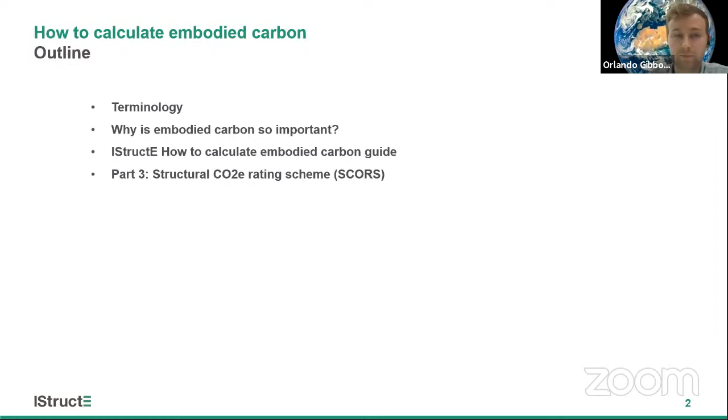So terminology: what is embodied carbon? Basically, when we have a building, we produce products, transport those products to the site, and construct the building or infrastructure asset on site. During its lifetime there will be some maintenance and repair works, and when that building or asset comes to the end of its life, there'll be processing of those materials to either recycle, reuse, or dispose of them. At each of these stages, various amounts of material, resources, and energy get input into the system, and out the other end comes a load of waste and pollution, and also greenhouse gas emissions. It's those greenhouse gas emissions that we call embodied carbon, related to the use of material resources and everything around it.

Another term good to be aware of is whole life carbon. Whole life carbon is embodied carbon, which I just briefly explained, plus operational carbon. Operational carbon is the emissions released during the operation of your buildings - that's heating, electricity, or in the UAE a lot of cooling, and water usage as well. So whole life carbon is those two things added together.

This is how we normally visualize whole life carbon, embodied carbon, and operational carbon. We use these life cycle stages and modules, split into four different stages: A, B, C, and D. A is all about producing the product, transporting that product to site, and then constructing it on site - that's A1 to A5. Then the in-use stage, B1 to B5 in the pink, and B6 and B7 in the yellow - that's stage B, about the use of the building.

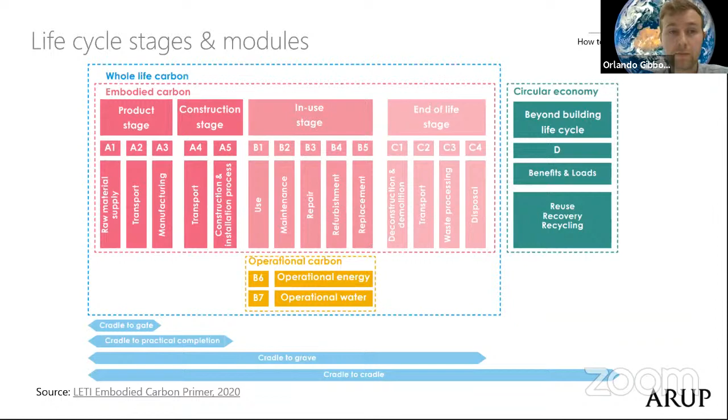And then lastly, you might have heard of the term net zero carbon, and there's lots of confusion about this. This term is still being properly defined in the industry, even in a part of the world where embodied carbon is a relatively mature subject to talk about.

It's still in its infancy compared to lots of other places in the world. Net zero carbon is basically where the emissions associated with some activity...

plus any offsets. Offsets means anything that's either taking greenhouse gases back out of the atmosphere, reducing the amount of greenhouse gases either by sequestration and storage, or by replacing a business-as-usual method with a much lower carbon method. There are a few different types of offsets - to be honest, offsets isn't my specialty, so apologies if that's wrong, but it's when those two things balance and equal zero. So basically you can think of offsets as negative emissions, and emissions is obviously any emissions getting released into the atmosphere.

With that, when we consider net zero there's a tendency to think, okay, I don't need to worry about emissions so much, I can just have loads of offsets and that's a good job done. But really we need to make sure that emissions are minimized as much as possible, because that's the most important thing. Offsets won't always be available to us as we hopefully use less and less energy, so offsets should really be a last resort.

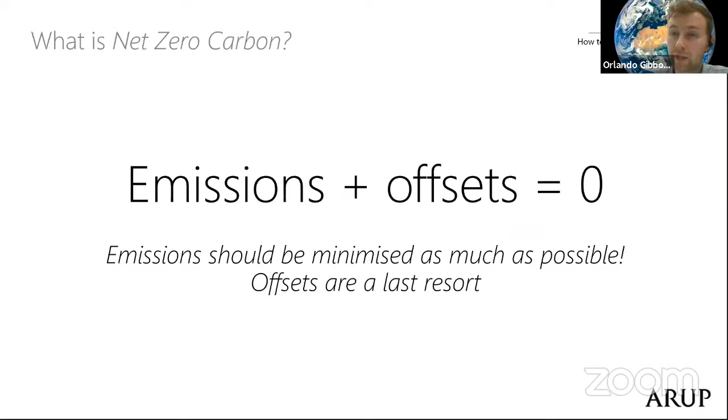And lastly, carbon is sometimes used as a common term for carbon emissions equivalent, which is basically any greenhouse gases such as carbon dioxide, methane, and water vapor and others normalized to the same global warming potential as carbon dioxide. So global warming potential is basically the ability of that gas to trap heat within the Earth's atmosphere.

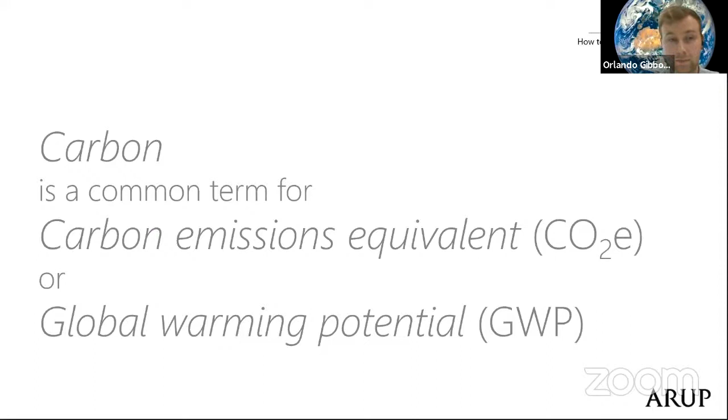So why is embodied carbon so important? As we've all heard, I hope, global temperatures are increasing. This is a sketched version of a graph from the IPCC, the Intergovernmental Panel on Climate Change, and it shows temperatures across the globe steadily increasing.

You might have heard 1.5 degrees C - we're trying to keep below that, but at this stage, where we are now in 2021, it's looking pretty inevitable that we'll get there. But we really need to make sure we don't go past 2 degrees C, because that does a huge amount of damage through changing the way our climate works.

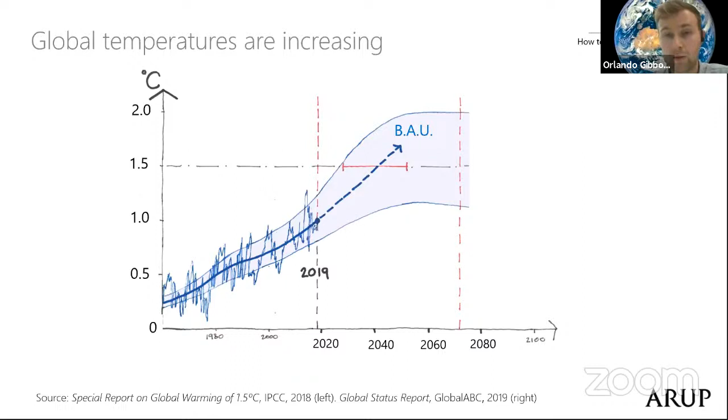In terms of the impact that getting to 1.5 and 2 degrees C have on the planet, you can see here: when we get to 1.5 degrees C, sea levels will rise by 0.85 meters, corn and wheat yields will reduce by 10%, and there'll be a lot more heavy rainfall over land. When we get to 2 degrees, considered the safe limit for ecosystems and civilization as we know it, there's still a huge sea level rise across the planet of 1 meter. Some cities will start to drown, such as low-lying cities like Amsterdam, and corn and wheat yields will be even worse - you get the idea.

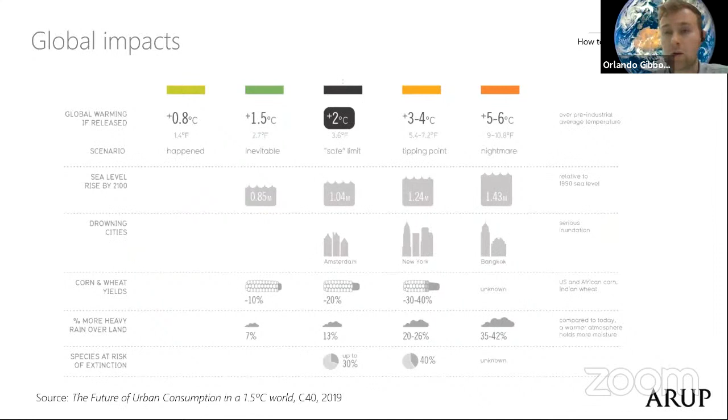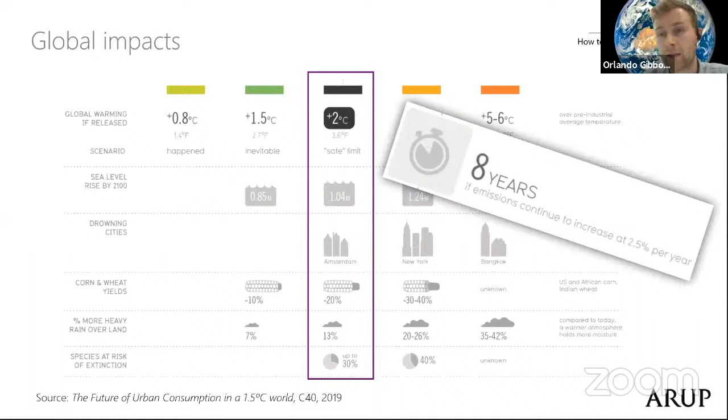So the further we go beyond these points, the more drastic the impacts on our lives as we know it will be, and also on ecosystems and biodiversity around the planet. Based on the carbon budget at the moment, when we're thinking about how much carbon we need to release to get to this 2 degrees C warming, at the current rate of emissions that is only 8 years away. So that gives a real sense that we need to do so much more than we currently are to change this around, to make sure we're not impacting everyone on our planet and future generations.

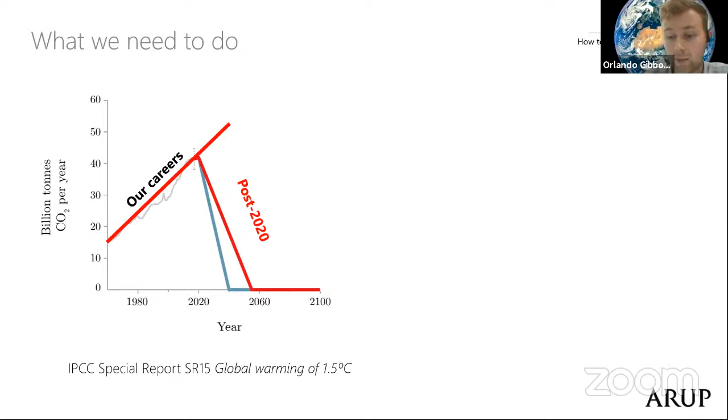So what do we need to do? As our careers have been going along, emissions have increased, as I've already talked about. Post-2020, we need an extremely sharp decline in the emissions we're releasing. This graph is from the IPCC, and that's without carbon capture and storage. So to do this, we need rapid, far-reaching and unprecedented change.

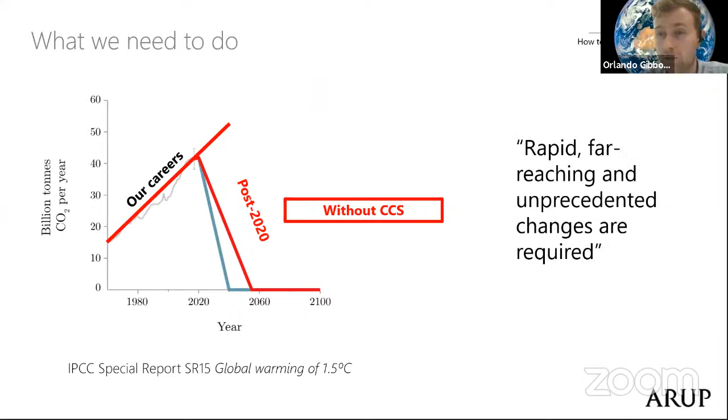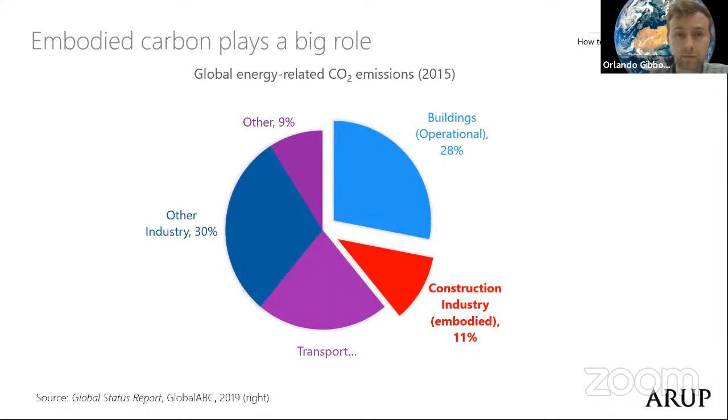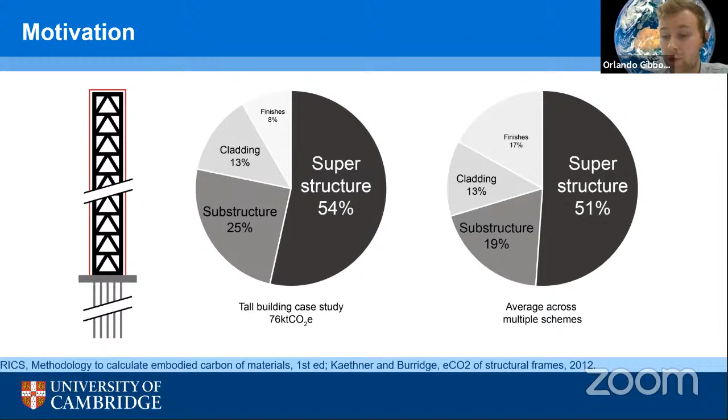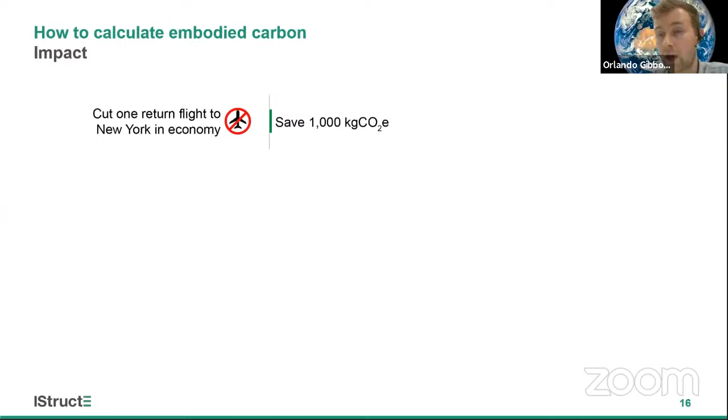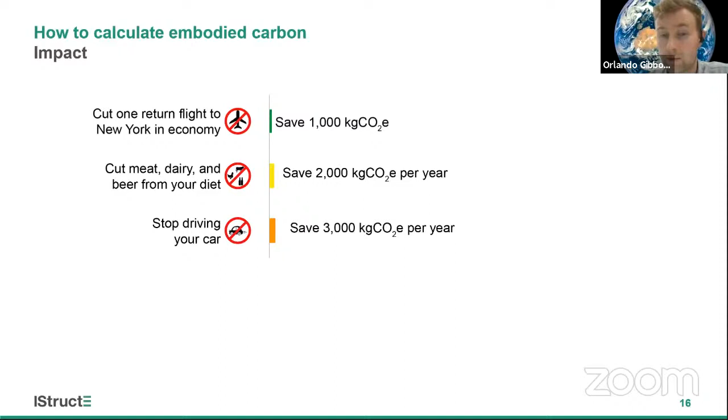If we compare this to our own personal impacts, here are some figures. One return flight from London to New York in economy: if I don't do that, I might save 1,000 kilograms of CO2. If I cut meat, dairy and beer from my diet, I might save 2 tons of CO2 every year. If I stop driving my car around 10,000 miles, I'll save 3,000 kilograms of CO2 per year. But if I make sure that on every project I work on, I reduce the structural embodied carbon by 20%, that would equate to a saving of roughly 200,000 kilograms of CO2 per year. That shows the scale of impact we can have as structural engineers on reducing emissions.

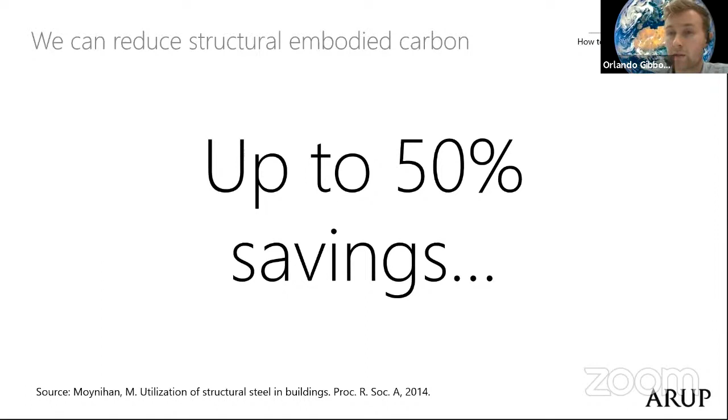So basically, as simple as this, we need to do everything we can to minimize embodied carbon of all of our projects everywhere in the world, and we need to do it now. And we can do it. Studies have shown that we can achieve up to 50% savings if we rethink the way we design in some cases and put more thought into it.

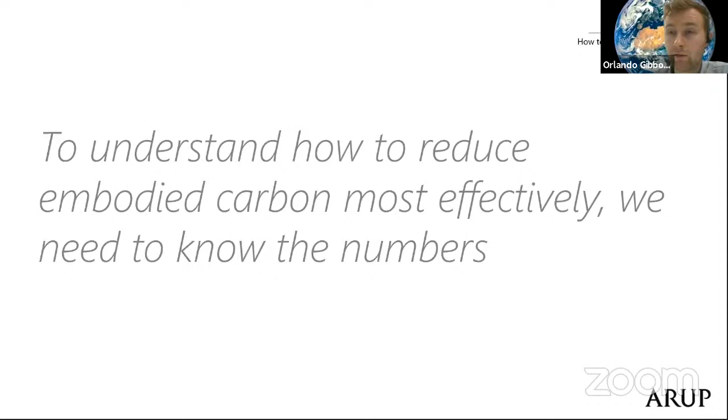Really, to understand how to reduce embodied carbon most effectively, we need to know the numbers. We need to understand what the embodied carbon is in our projects and where it lies in our structures. This really led to producing the guide on how to calculate embodied carbon, which is freely accessible on the IStructE website for anyone. I'm going to talk about it more now.

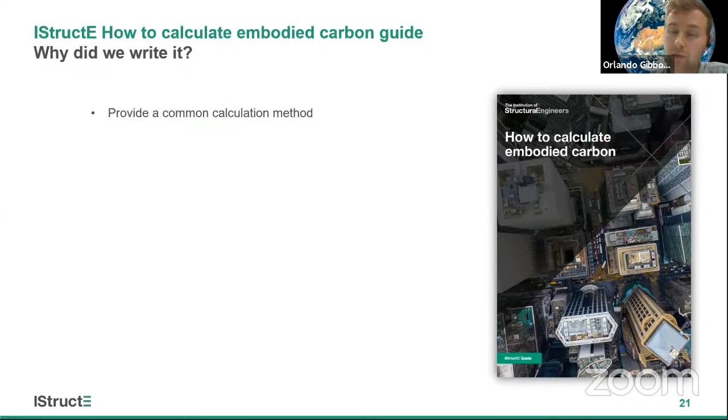So why did we write it? Well, to provide a common calculation method, because in places where embodied carbon is calculated, it can be done in slightly different ways, and there is some ambiguity about what should be done. So this was to provide some consistency. By making sure everyone's calculating it consistently, we can actually start to compare designs against each other, because comparing two different things that are done differently just doesn't make sense.

We calculate embodied carbon to improve our understanding of it. We understand where it typically lies in our structures and how we can reduce it, support material demand reduction, and help us find new ways to reach net zero, which is one of those terms I mentioned earlier.

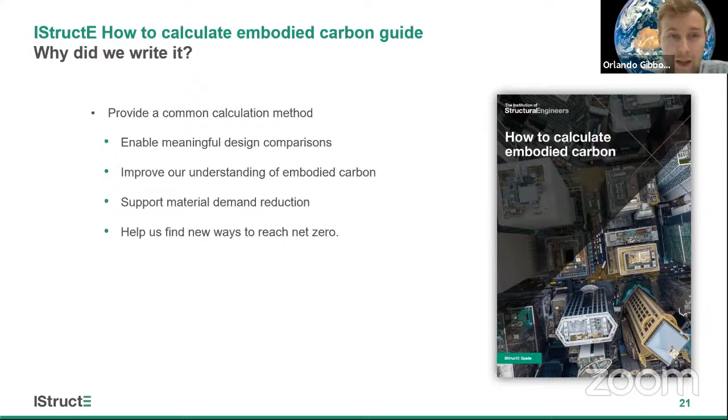I wrote this guide in collaboration with Dr. John Orr from the University of Cambridge, and we had the help of many people who provided fantastic comments and input. Thank you to all of those people—it wouldn't have been possible without them.

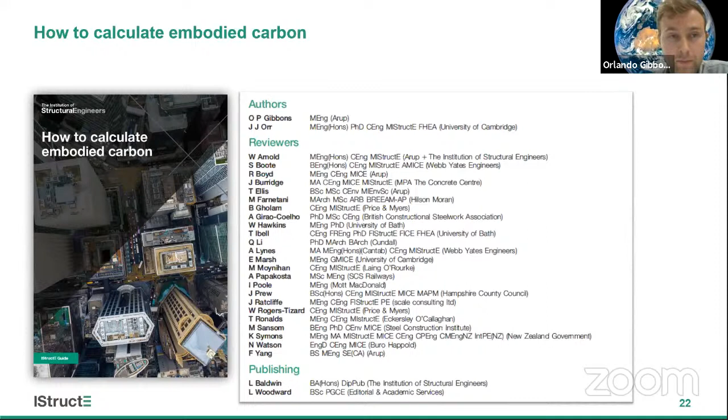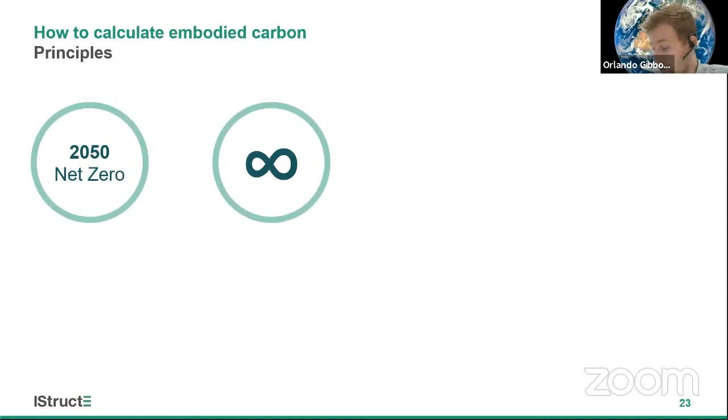We need to evaluate design decisions against their carbon impact, considering how much emissions each design decision has associated with it. We need to communicate this to the design team so we can work together with other disciplines to reduce carbon emissions. And then, of course, we need to reduce carbon emissions, as I just said. Lastly, we need to report these findings from our projects—we need to share this data so everyone as an industry can learn more and push carbon reductions further.

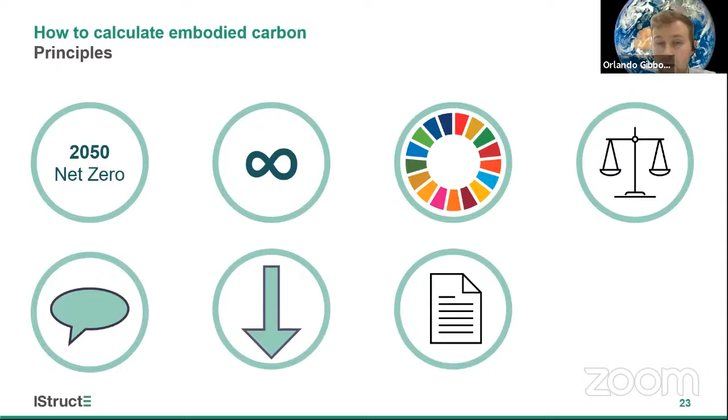And then this is something that we've done in the guide. I'm sure you can go on the IStructE website and type in how to calculate embodied carbon and come up with the guide. And within the guide, there are some things we've done to try and make bits of information clearer to the reader.

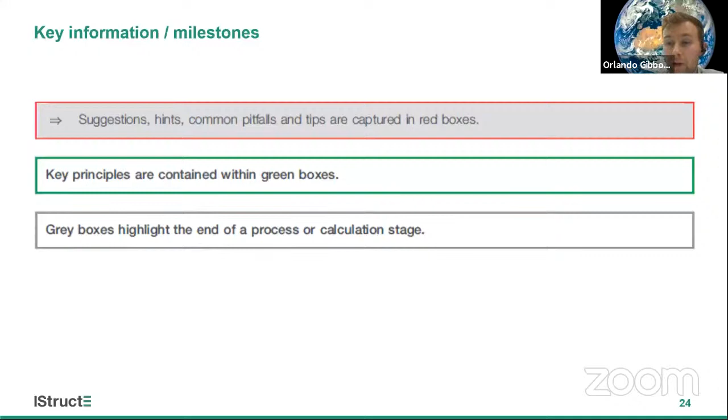We've made some suggestions, hints, common pitfalls and tips. In the red box, and in the green box we have key principles, and in the grey boxes it highlights what you have at the end of a part of the process. So the structure of the guide is: inputs to the calculation, the process, and the output. It's structured around that very simple idea.

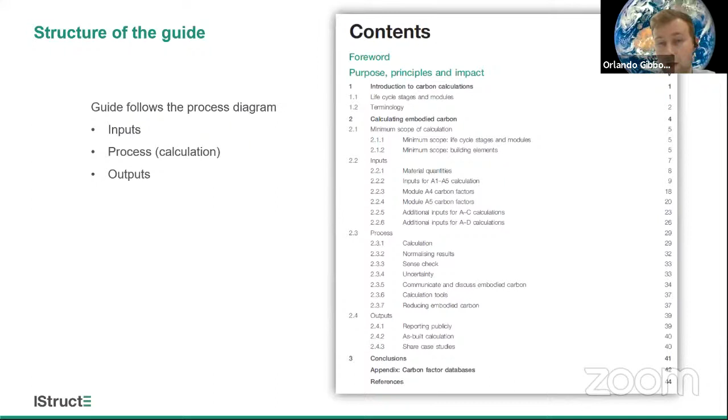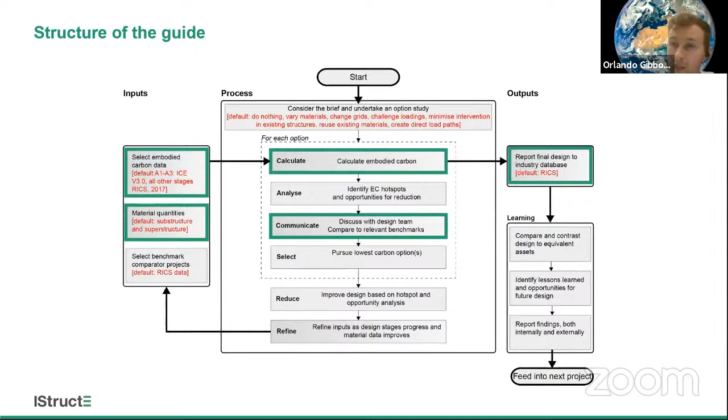This is the flow diagram we use to describe the different parts of the process. Inputs on the left, process in the middle, outputs on the right. With inputs and process, any good consideration of embodied carbon should iterate between these two, because the data and inputs you have will develop in accuracy as your project goes into more detailed design stages. You'll want to update those inputs to refine your carbon calculation.

Something definitely worth mentioning, and I encourage you all to search this on your internet browser: in March, the structural carbon tool was released. This is a project between the IStructE and a design consultancy in London called Elliott Wood. It's a fantastic tool, Excel based, very easy to use, accessible from the website, and there are video tutorials on how to use it.

It currently contains mostly UK relevant data, but you can add any data you want to it, so anything more relevant to the UAE. It's basically the How to Calculate Embodied Carbon guide in Excel version. It distills the guide, brings it into Excel, and allows you to get on with it much quicker, which is brilliant.

So, how to calculate embodied carbon. Throughout this I've got a worked example that I'm going to go through. I might go through it relatively quickly because I want to leave time at the end for questions. This imaginary project is in London, a commercial building, 56,000 square meters, construction cost of £120 million.

The roof extension had CLT, which is cross-laminated timber, on a steel frame, a side extension of some concrete with new foundations, and also a refurbishment of an existing building.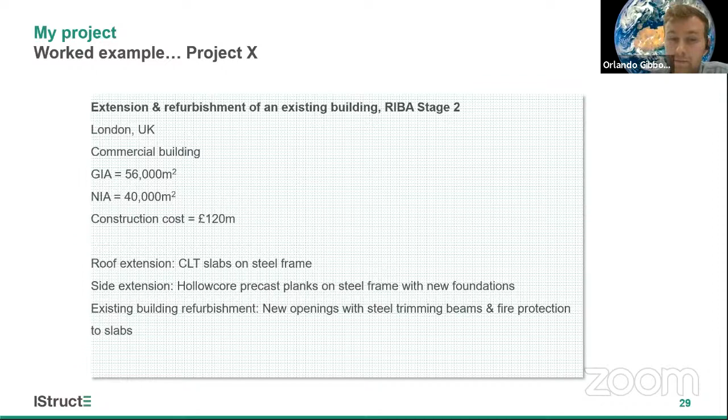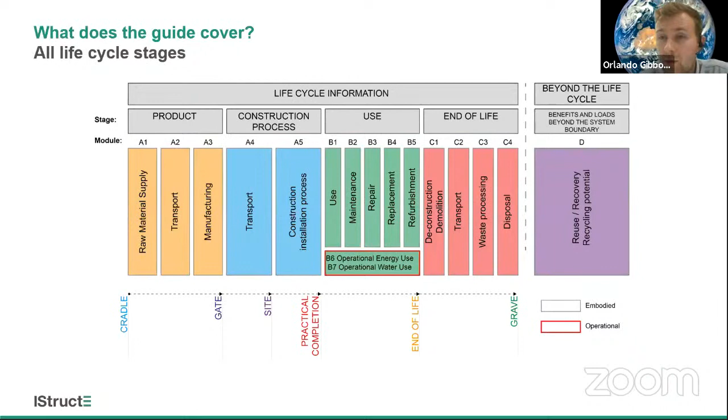So the first thing we need to think about is the scope of our calculation. These are the life cycle stages discussed at the start. This is the first thing you need to consider: what is the scope in terms of life cycle stages. The minimum scope we say in the guide that you should consider is A1 to A5. This is the minimum - you shouldn't consider less, but considering more is better.

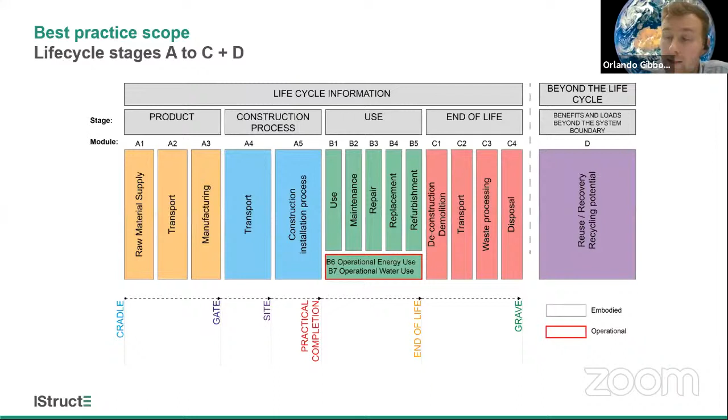If you were to consider all of the life cycle stages, from A to C including module D, that is the ideal scenario. But appreciate that a lot of people new to this topic - actually focusing on A1 to A5 is best. It's where we have our highest impact, and it also simplifies the calculation a bit.

So why do we use A1 to A5 as a minimum? A1 to A5 is basically material extraction all the way to practical completion on site - when the building's finished and just before people are about to move in and start using it.

A1 to A5 emissions are all released by the time the building is being used, so they will be released before 2050, which is our deadline for getting to net zero. We have most certainty over A1 to A5 emissions data because it's happening closer to the time we're actually in right now, and the majority of structural embodied carbon is in modules A1 to A5.

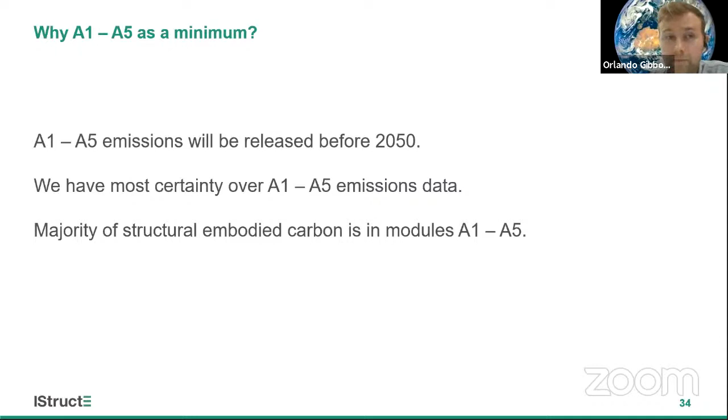In terms of minimum scope regarding building elements - so there's the life cycle stages we consider, but also which parts of the building we're thinking about. This table here is from a Royal Institution of Chartered Surveyors guide. If you pay attention to the right-hand column, this gives you a list of the things you should be including in your embodied carbon assessment.

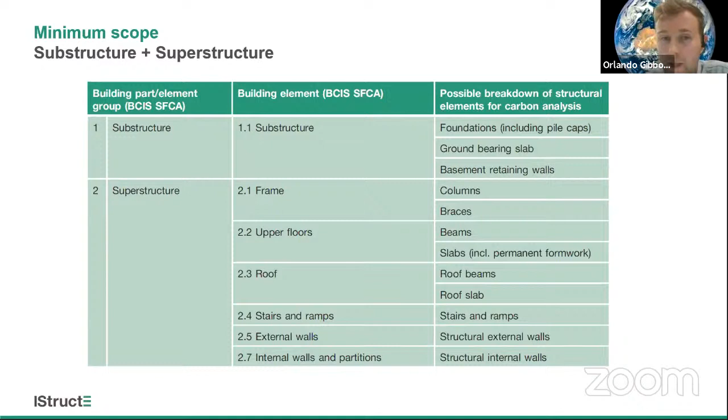For example, you should consider fire protection because fire protection is something that provides a structural function. It makes sure that the structure retains its structural integrity through different scenarios.

You should coordinate the scope with the rest of the design team. So if the architect's also looking at embodied carbon, make sure that you coordinate with them so that you're not both duplicating work, but also doing it all consistently.

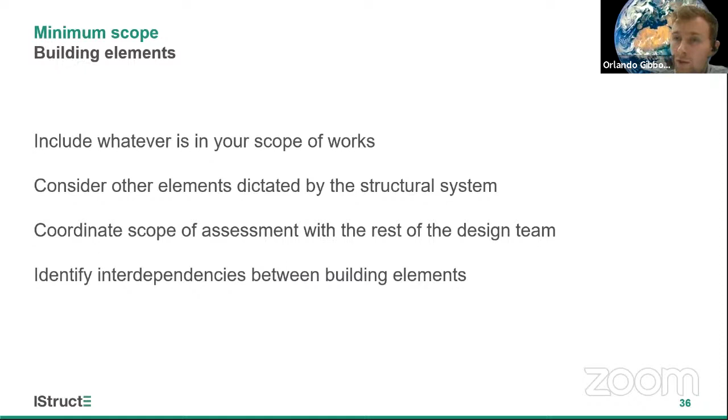And then identify interdependencies of building elements. So think if you are increasing the depth of your floors, what effects that might have on the facades, or if you're using exposed concrete rather than steel that's protected with fireboard, think about what that might do to the ability for the building to store thermal mass and reduce operational emissions. So those are other things to consider alongside embodied carbon.

So the fundamental principle is probably the simplest calculation you're going to do on your project. You calculate your quantity of material, which we do in design anyway, and you multiply it by a carbon factor. You basically do that for all products used at each stage of the life cycle.

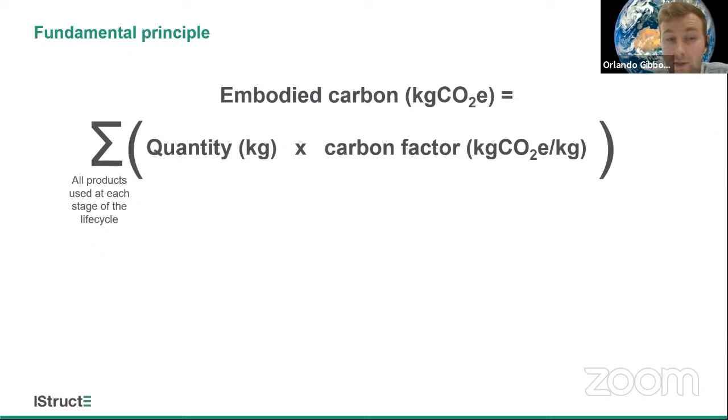So obviously, for quantities, there are numerous ways to do this, and it depends on design stage. You'll have your own way of doing it. Maybe we'll come on to that in a second, actually.

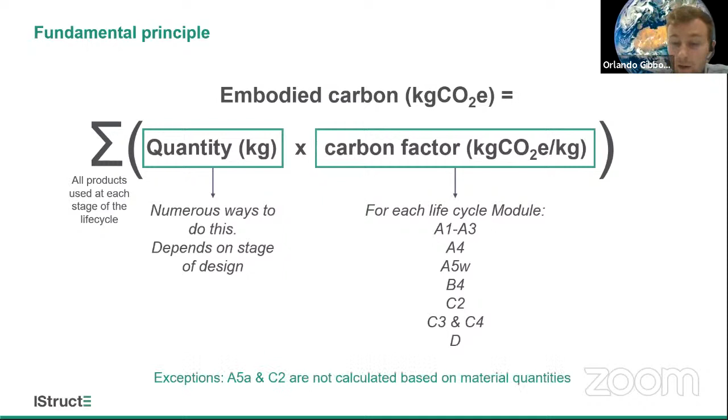And for carbon factor, there's a different carbon factor for each life cycle module, A1 to A3, A4, A5W. Those are the ones that we're going to be looking at. So for our make-believe project, we'll be looking at A1 to A5, which I mentioned earlier.

So think about the inputs now, which are material quantities and embodied carbon factors. So the inputs to this calculation. And on the process diagram, this is where it sits.

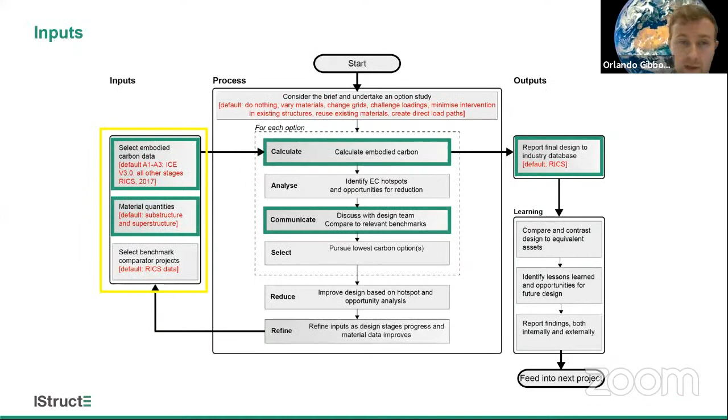First of all, material quantities, you can get these from a number of places. Just make sure it's appropriate to your stage of design. So it can be from scheming manuals, so sort of rules of thumb. It can be from your previous project experience. You might have worked on a similar project and you know the kilogram per meter squared of steel that was used, or the reinforcement rate.

You can obviously do your own manual calculations. You can use a quantity surveyor's cost plan, or a cost consultant, as it might be referred to over there. Use your structural analysis models to generate the quantities, or use your building information models to generate the quantities.

But make sure that if you are using some sort of modeling software to get quantities, that you also include partially modeled or unmodeled elements. For example, something that's normally not modeled in building information models is reinforcement within concrete, or the fire protection, or the damping, the screed, that's helping to damp the vibrations of your floor system.

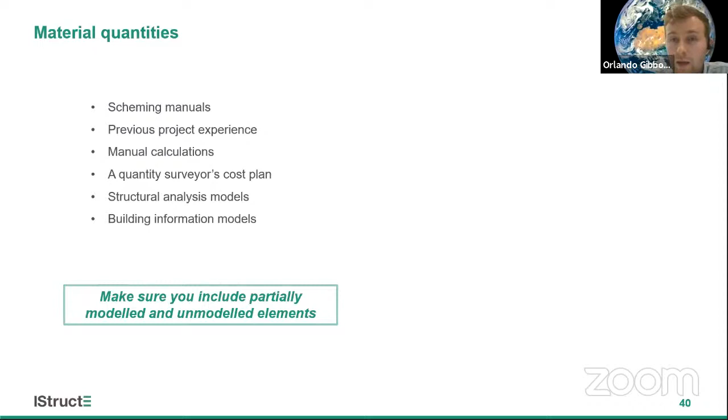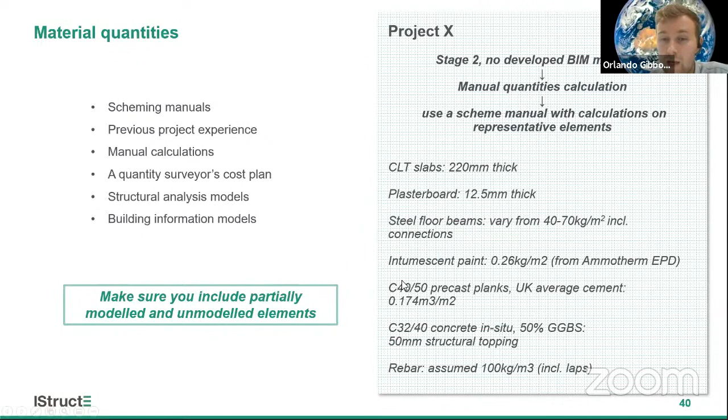So in this example, let's say we're at stage 2, so we have no developed BIM model. I did a manual quantities calculation, and I used a scheme design manual to get quantities for representative elements. These are the quantities of my different materials and any assumptions that I've made.

One of the things you really need to bear in mind is that in the early design stages, we don't have perfect information. We don't know exactly what's going to happen at the end of the project when it's actually built. But do not let this deter you from calculating embodied carbon. The uncertainty in quantities will decrease over the course of the project, and you can update your calculations to reflect this. But if you miss the opportunity to calculate embodied carbon and see how you can reduce it in the early design stages, you lose a huge amount of the potential to reduce carbon.

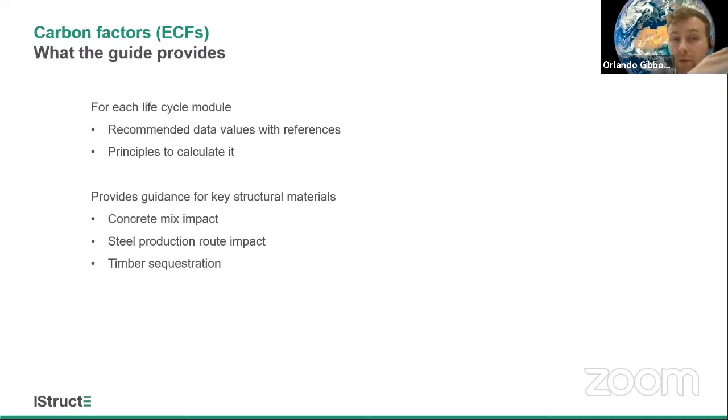So the guide provides this information. It has recommended values for each lifecycle module. It provides guidance for key structural materials, and it references the RICS guide, which is the UK best practice standard for calculating embodied carbon. It is UK focused, but we do reference data from elsewhere in the world where it is available. I think Julia is going to help us out with that later on.

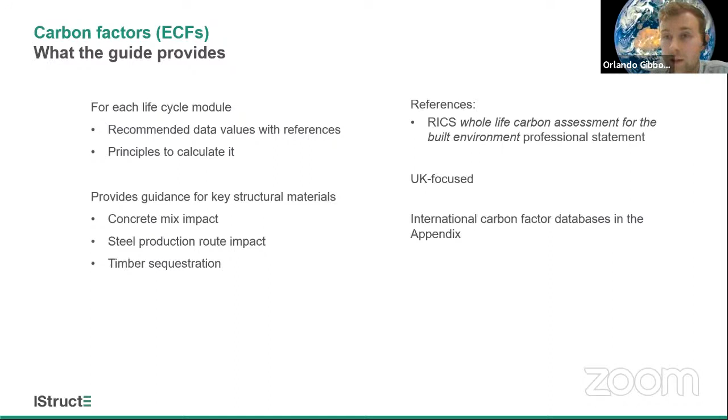So carbon factors for modules A1 to A3.

They're very dependent on production method and location, so take that into consideration when choosing which ones. Don't be deterred from calculating embodied carbon due to uncertainty in these factors. Supply chains are complex things, and it will be difficult to have precise information on the emissions of your materials. But you need to think logically about your best guess, and proceed on that basis.

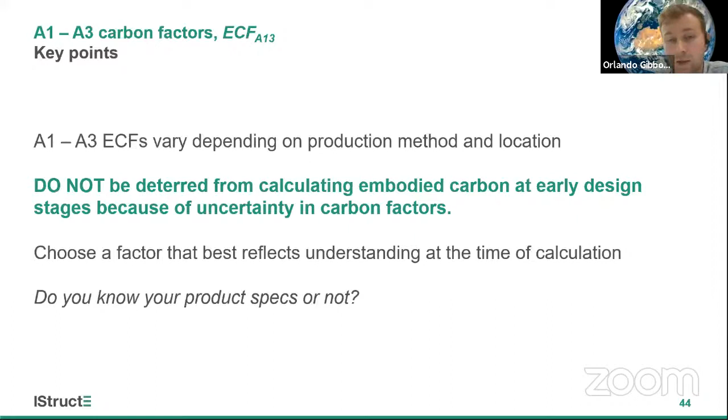The way we split this up in the guide is we first consider whether you know the specification of your material or product. If you don't know that, which is normally at the early design stages, we've included a table in the guide that recommends typical values to use as a starting point.

So Julia, can I invite you to jump in here? Yes.

So we just talked about EPDs. We must say that for UAE, we do not have a comprehensive carbon factors library, nor for any countries in the Middle East that we are aware of in our IStructE regional group. But there are EPDs available for lots of materials like steel, rebars, concrete, and precast, and they are region-based.

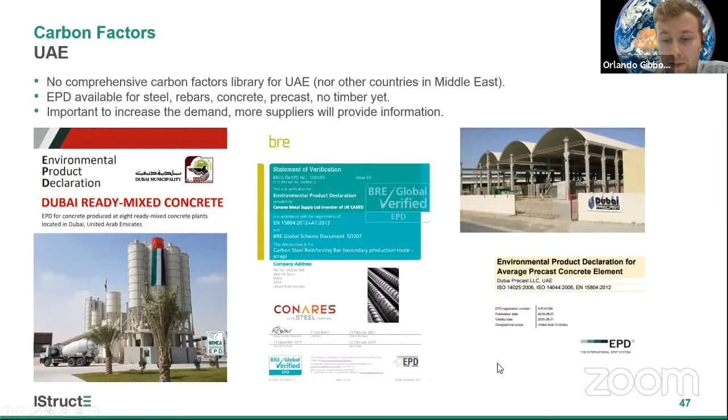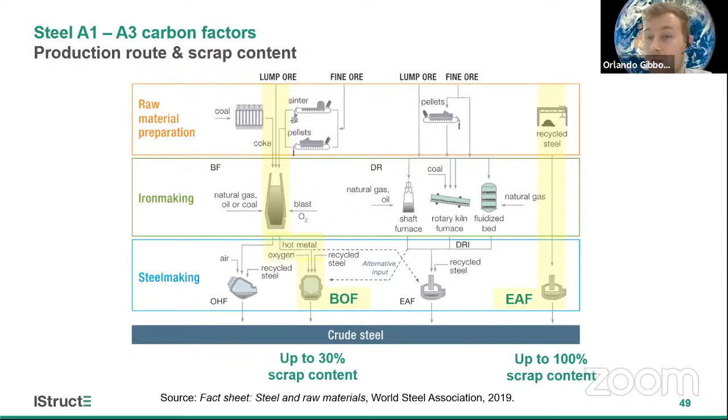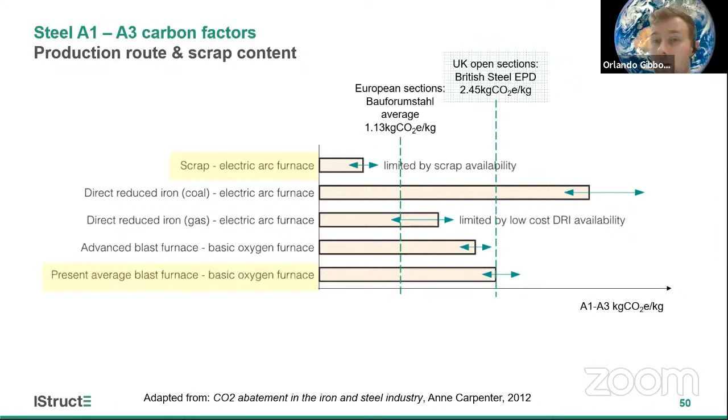I've marked on this graph a couple of EPDs that we use in the UK and in Europe to work out the embodied carbon of steel.

When the tree is cut down, typically only 50% of the stem is used for construction, and the other material in the crown and other parts of the stem are used in other industries. Then at the end of the life cycle of that piece of timber, that carbon will be released back into the atmosphere in one way or another.

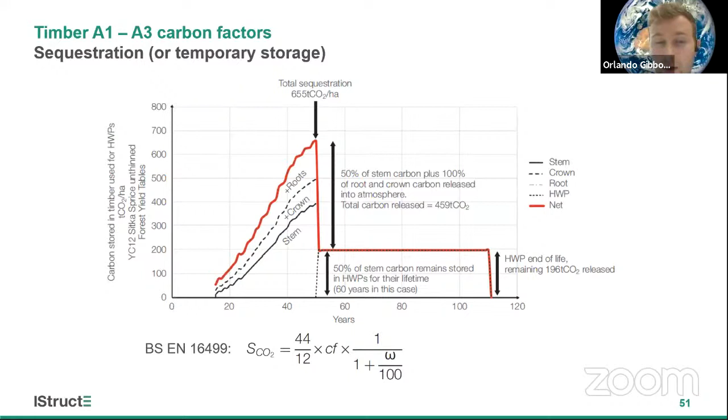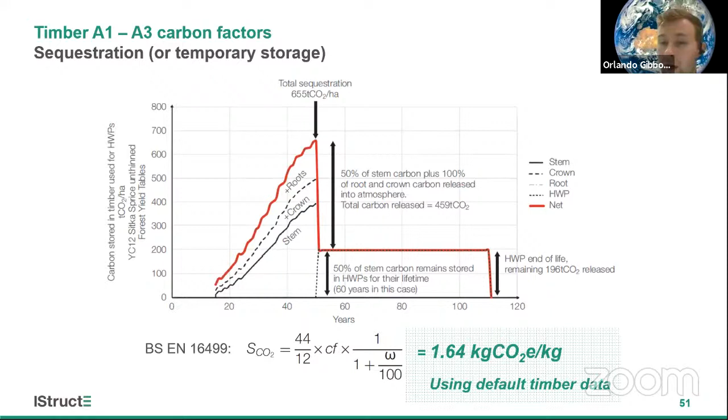So this graph shows the carbon stored in the timber product over its lifetime. And this equation at the bottom is the typical amount of sequestration per kilogram for a timber product, so you can use that as a default.

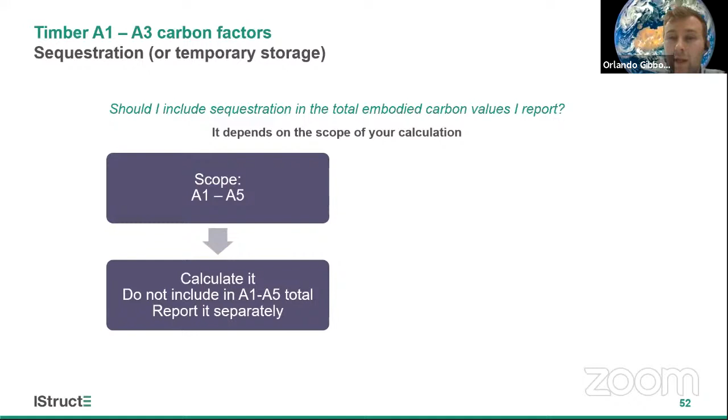This is an interesting one because there are rules as to when you include sequestration in your calculation. Sequestration gives you a negative number, but you shouldn't include it in your A1 to A5 scope. So if you're just considering those emissions released at the start, don't include it. But if you're considering the whole life cycle, then you can include it. We could do a whole other webinar on that, which would be great, but I'll move on for now. Whatever you do, just be clear about what you've done.

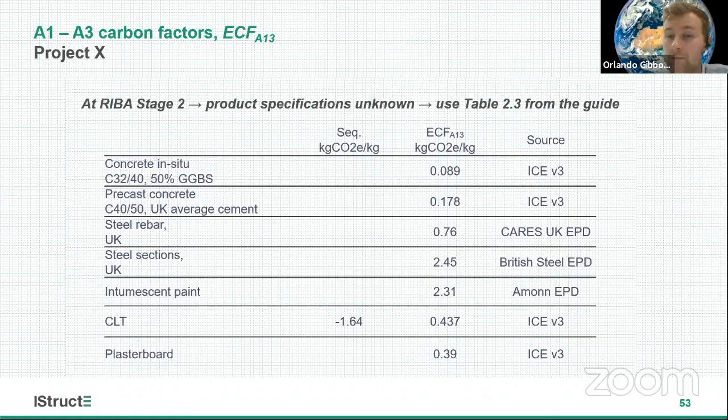So this is for Project X. I've got all my materials and I've got the embodied carbon factors for A1 to A3. Then think about modules A4 and A5, the construction process.

For module A4, basically you calculate the emissions associated with the transport. You multiply transport distance by a transport emission factor, and you can most likely get those transport emission factors either from a government website. In the UK, we have a government website that has these factors, and that's what's included in the guide. But there are international factors as well, and in the update of the guide being released later this year, some more internationally representative transport emission factors will be included.

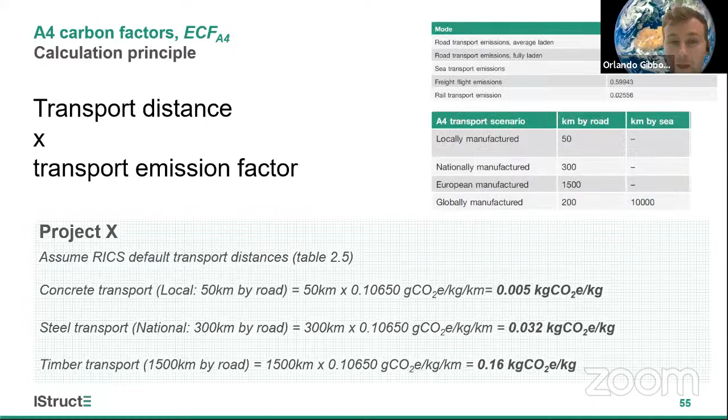For A4, really good things to do to get better accuracy are to ask the manufacturer for predicted logistics and estimate your transport distances based on project-specific scenarios. So if your concrete's being produced in Dubai and your project's in Dubai, you'll have a pretty good idea of your transport distance, so you can adjust it. Whereas if your steel is coming from somewhere in China and being brought to the UAE, you can also make a judgment as to how that material is being transported there.

So going on to A5 now. A5 is the actual process of installing and constructing the building on site. This is broken down into two areas of emissions: one is the emissions associated with the production and end-of-life impacts of materials wasted on site, whereas A5A is site activities, which is really on-site electricity consumption and fuel usage, from machinery like diggers or cranes and site huts as well.

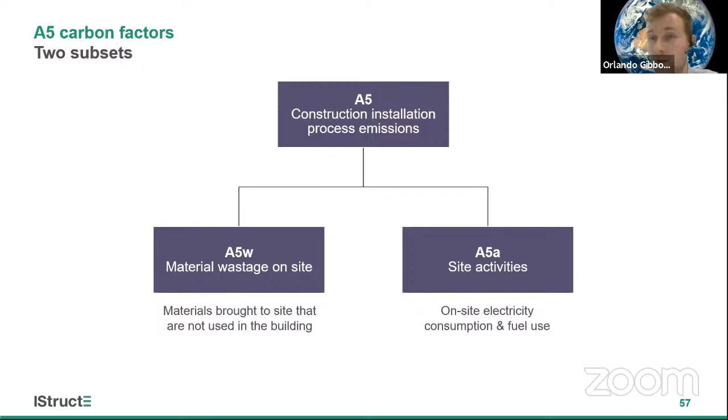So where the workers are sort of doing their work next to the site, all of that's in A5A.

So the life cycle emissions of materials waste, this might look like a bit of a daunting equation, but ECF stands for embodied carbon factor, and this WF factor here stands for waste factor.

So you're basically multiplying the embodied carbon of all of these different stages, A1 to A3, A4, C2, and C3 and C4. These Cs are the end of life embodied carbon factors. You're multiplying it by the fraction of materials that are brought to site that are wasted.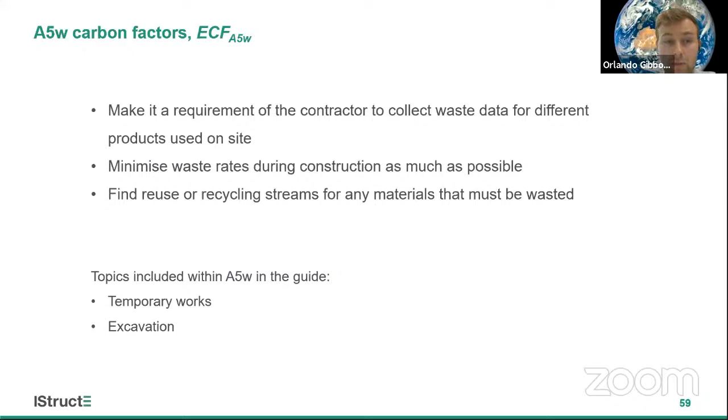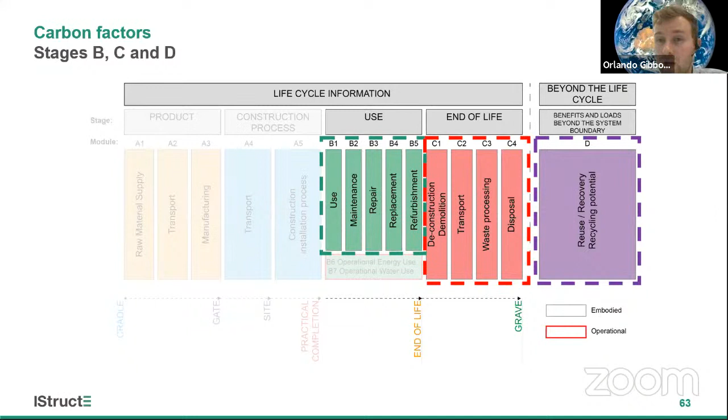I'm going to skip over the site activities because we don't have much time. There's also a load of information on stages B, C, and D, which is all in the guide, but we won't have enough time to do that now.

So in summary, we collect inputs for the project, and then we go into the process, the actual calculation stage. As we went through before, we've got the simple principle of quantity multiplied by carbon factor.

And then this is just an example of a spreadsheet that I had used before, where I've got all of my quantities of materials for my different building elements, arranged by embodied carbon factors by different stages. And I've used Excel to show me where the hotspots are.

So the darker red numbers are sort of the higher embodied carbon. So you can see my superstructure, upper floors, beams - that's where the majority of my embodied carbon is sitting.

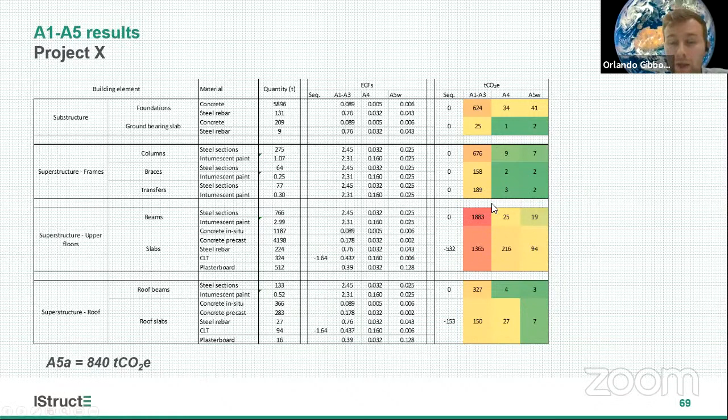This is an example of a project that I worked on where we considered different options. This one, instead of building a new building, the client decided to refurbish the existing building and extend it, which saved a huge amount of carbon. So this is really an example of where refurbishing buildings is way, way better than building something from scratch in terms of carbon emissions. They saw 52% embodied carbon savings.

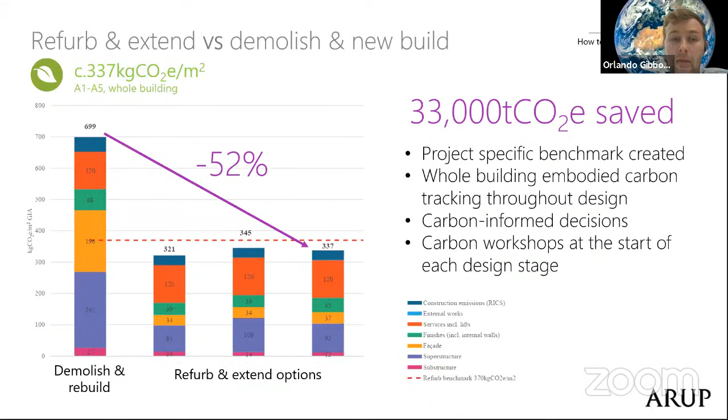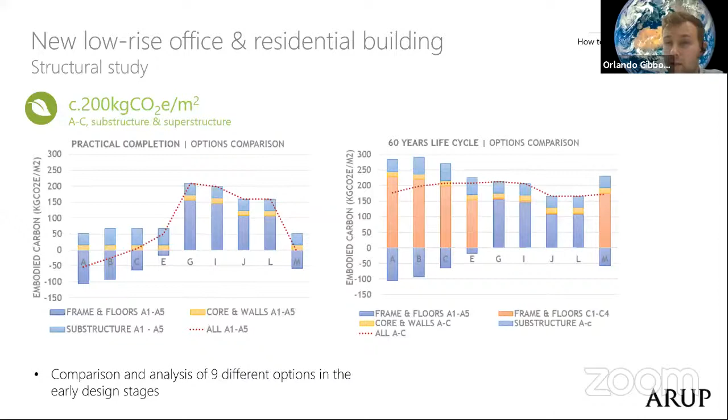And these are just some other options - examples of where different structural systems have been assessed based on their embodied carbon, that inform the decision-making process.

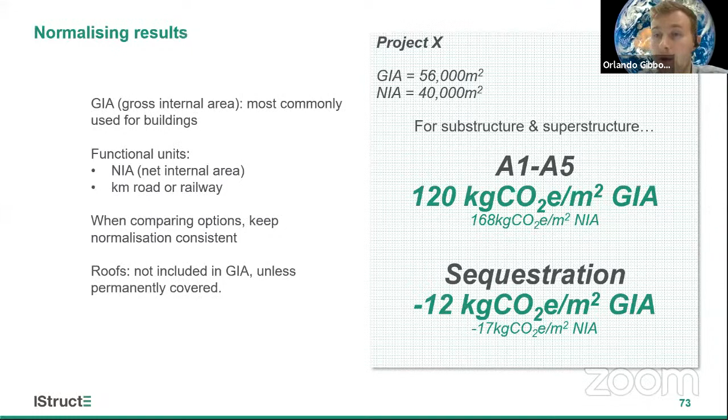And another thing that you do, once you've calculated the total carbon emissions, you normally normalize it by the meters squared of that building, by the area of that building. And crucially, in order for this to inform the design process and what you're actually going to do on your design, you've got to share it with the design, communicate it to the project team.

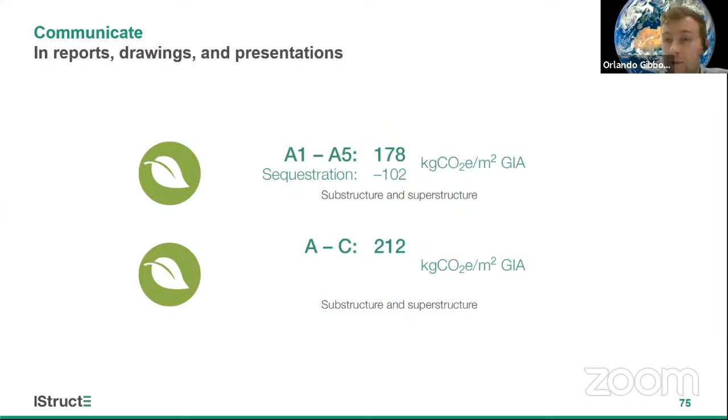So regularly communicate it and be transparent about it. You can do this through a workshop or just through general advocacy. And in reports and drawings, it's always good practice to include something about the carbon emissions associated with your project.

And then once you've done that, once you understand where your embodied carbon hotspots are, then you can think about reducing it. This is a framework that we use quite a lot for thinking about how to best minimize embodied carbon. That starts with building nothing, and advising your clients how they can make best use of the existing assets.

Building less, so advising how they might be able to reuse parts of it and maybe extend bits of it in order to maintain the same value. And this all still requires structural analysis work. So it's not like we're completely out of jobs, but it's just providing information and expertise to the client that will allow them to do something with their existing assets.

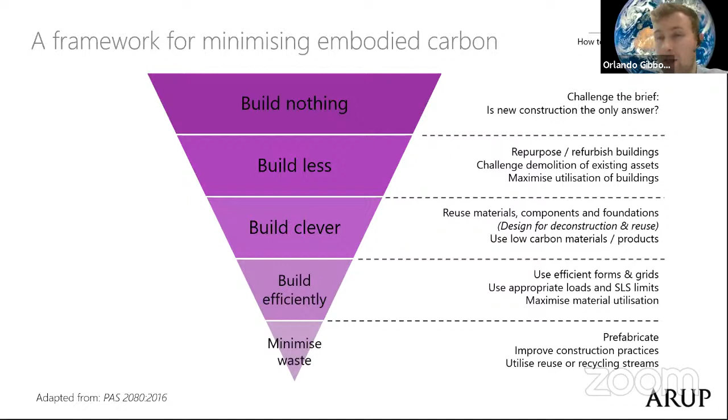Building clever and efficiently means really thinking about the materials you're using and minimizing the use of those materials. And based on the different design stages that you're at, you can have the biggest potential for carbon reduction at the early design stages of the project.

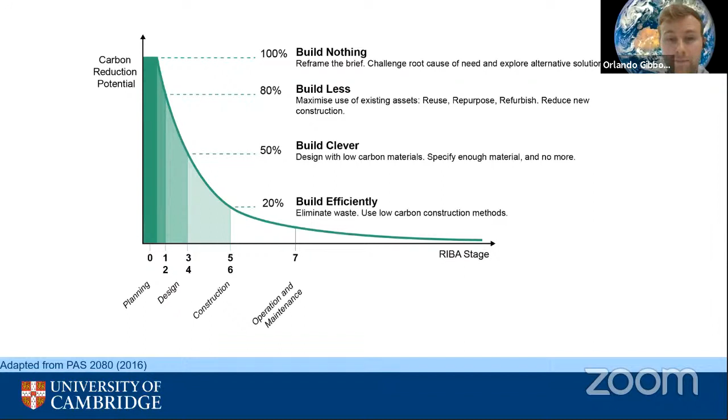And that kind of decreases as you go along. So, as I said earlier, the best way to find out how to reduce embodied carbon is finding the hotspots on your project. There will be a guide released soon called Design for Zero from the IStructE, so look out for that.

Then outputs - I'll very briefly touch on this - but reporting and sharing this information is really going to help the industry in your region push forward and understand how to do this across more projects, and raise awareness of it. It's also crucial that once you've done this throughout the design stages, you need to do it at the as-built stage as well.

So you need to work with the contractor to understand what the emissions are when it's actually built, because we might have ideas of where the materials come from during design and what the quantities are, but once that building is built, it has a certain amount of embodied carbon. We need to find out what that is so we can check whether our design assumptions were accurate, and also so we just know what's going on. Otherwise, we're still in the dark on this topic.

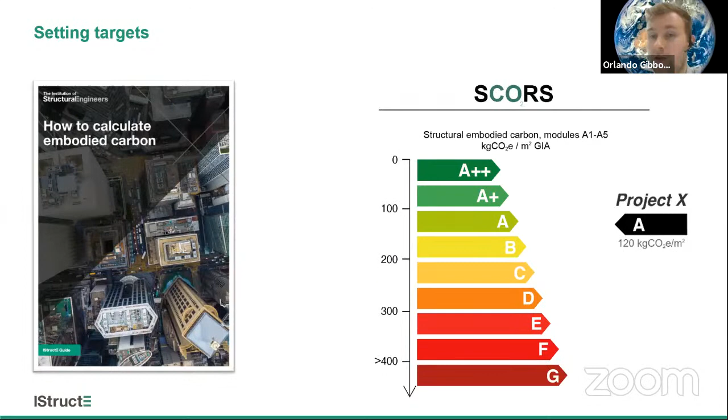And share case studies. Very quickly, since we've only got 8 minutes left, there's a rating scheme as well called SCORS that a few of us at the IStructE came up with. It gives a range of what embodied carbon looks like on a project, and it gives you a letter rating for your embodied carbon based on your kilograms of CO2 per meter squared. That range was defined by data from a number of different firms, including Arup, Thornton Tomasetti, and Buro Happold, who gave data on the different embodied carbon ranges, and that informed the A to G rating.

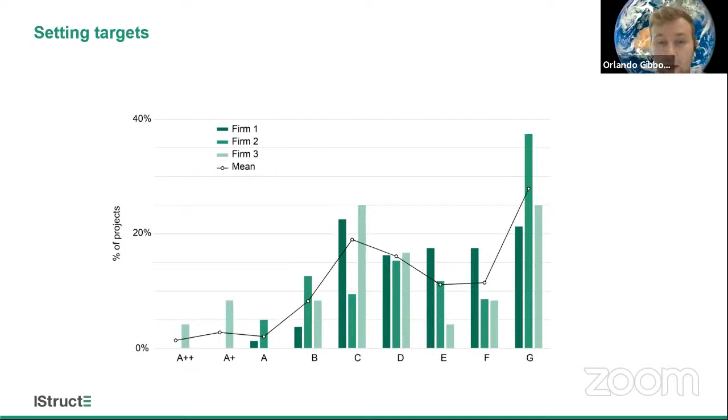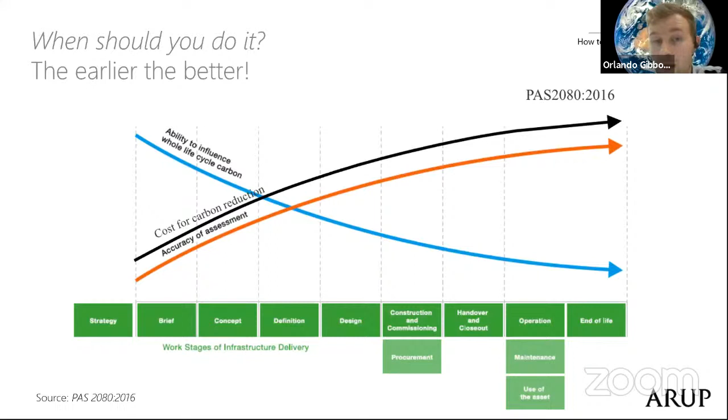Some key messages. So when should you calculate carbon? The earlier the better - you have way more influence. Calculate it at every stage of design and construction. Calculate it whenever you have a design decision to make, as it may inform that decision, and do it on every project, because we don't have time to not be thinking about this. It's going to affect us all sooner or later, and it certainly will affect the next generation. It's the first step to addressing the climate emergency.

And next steps - just quickly, an update to the guide is coming. It's a very fast evolving area in the UK and beyond. I know some regions are further ahead than others, but we're looking to keep this guide up to date, so we'll be relaunching a version 1.1 later this year. You can find the guide on the website, and there's also a brief version that was released in the Structural Engineer magazine last year.

Thank you very much for listening, and I'd be delighted to take any questions. I'm sorry there's not much time left, but I hope that's given you a good overview.

Thank you very much for the great talk, really. It was very informative, and I hope it will be very helpful for many of us.

Let's start with one question: since we are at the early stages in the UAE for embodied carbon calculations, what is your advice to accelerate this process and catch up with other regions?